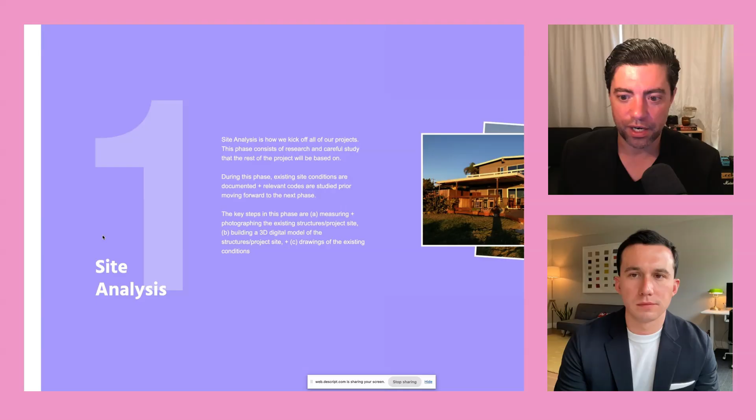Let me explain why. If you're looking to do a remodel, this probably takes the most time for phase one because we have to measure the entire structure. If you're looking to do a home on a vacant lot, I have to receive a survey from you, generally with contours, and then we'll model that — it's much quicker. And if you're looking to do a detached ADU, like in the example you presented, Billy, oftentimes I don't have to measure the outside of the existing home. So right there, you have 3 different variations on phase one. Basically, phase one is creating an as-built drawing package, which shows what is on site at the moment.

Once that's complete, we can move into design, and schematic design is basically the first step of that process. Not every project needs a schematic design phase. For example, if you were looking to do a garage conversion to an ADU or a JADU, we would skip this phase because we generally already know where that ADU is going to occur, and within the limitations of a 1 or 2 car garage, there's only so many things you can do.

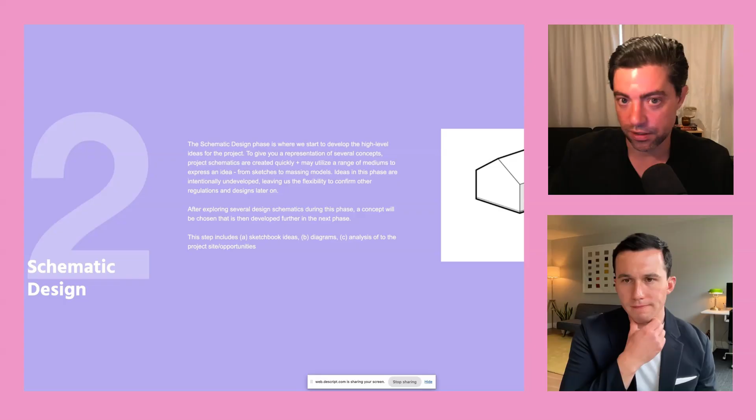But in your scenario where you want to do an ADU, there could be multiple options. Maybe we do the ADU in the backyard on the right side, maybe on the left side, maybe attached to the home, maybe over the garage, maybe in the front yard because the code now allows you to build an ADU up to 800 square feet in the front yard. One of the things you'll notice throughout this process is there's no right or wrong answer — every solution comes with pros and cons, and it's just a constant trade-off.

There are certain things we like to cover in the schematic design phase — access, privacy, views, utilities, solar orientation, these types of things. We want to demonstrate all of these to the client, then we'll present multiple options along with the pros and cons of each. We'll discuss with the client and see which direction they want to go. So schematic design is a very high level design phase, and one of the things you'll notice as we go through these 4 phases is you start very broad and narrow things down in each sequential meeting.

One of the other things you'll notice as we go through these 4 phases is you start very broad and narrow things down in each sequential meeting. So once we present the schematic design options and the client has made some decisions, we move into the next phase: design development.

This is the phase where we're doing the most collaboration with our clients. This is the first phase where you'll see floor plans and elevations. We'll do 2 to 3 meetings, depending on how large or complicated the project is. In these meetings, we sit down with the client and explain the design, which is based on phase 2.

Then we look to get feedback from the client. Maybe they determine the bedroom needs to be larger, and this is the perfect time for them to let us know. Or maybe they need more closet space, or they've decided they want to sneak an extra bathroom in.

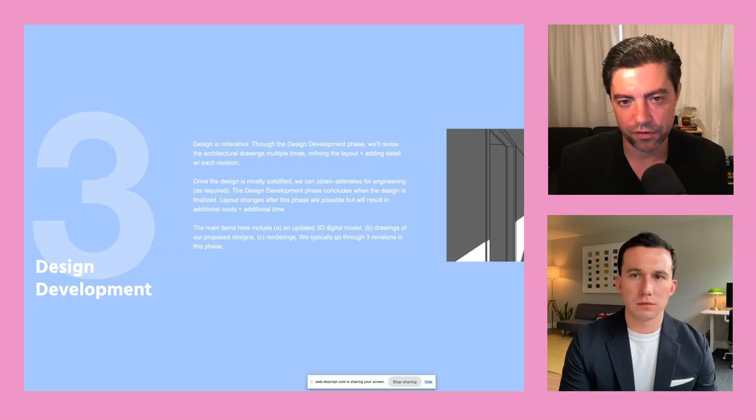Generally we provide a full kitchen layout with kitchen elevations, lighting plans, electrical outlet plans, and a landscaping plan, which we call the exterior design plan—basically the bare minimum for landscaping. It doesn't replace hiring a landscape designer, but it satisfies the minimum requirements of the City of San Diego, which often requires certain types of landscaping to be planted.

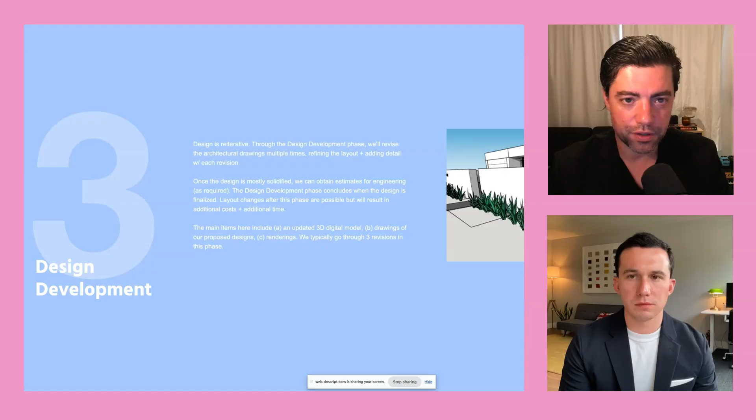So the design has to be finalized here. Phase 2 and phase 3 is where the design occurs—that's where we do all this work with our clients. After the design is finalized, we move into phase 4.

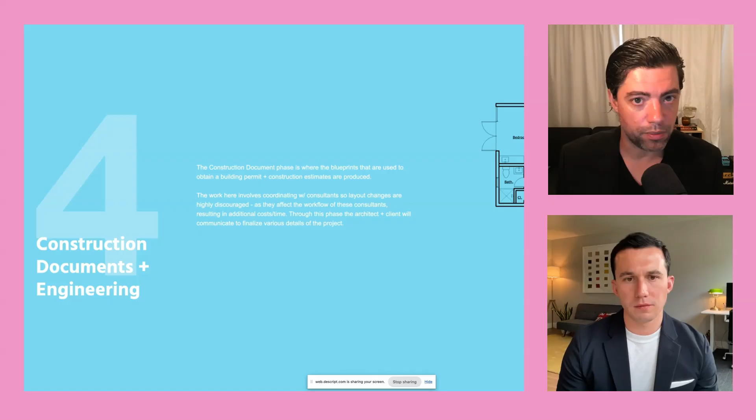In phase 4, we take the finalized design and begin to produce the architectural construction drawings, generally about 35 to 40 sheets. We also commission the structural engineer and the Title 24 consultant, and they begin their work. So in this phase, you have at least 3 different professionals working on the project at the same time.

We're coordinating with each other, but sometimes the client doesn't need to be aware of it. If the structural engineer says, hey, can I fit a 12-inch deep beam here rather than a 10-inch deep beam—that's a decision I can make myself.

But if the structural engineer comes back and says putting some posts on this balcony would be a lot more structurally efficient, that's something I'd go back to the client about—asking if it's okay to put posts there. Or maybe we're in an area where we can't put posts, and then I don't have to go back to the client; I just let the structural engineer know we've designed it in a way that we cannot do posts. There's a lot of coordination that occurs in this phase.

At the end of the phase, we're coordinating all 3 trades and putting it all together. On a larger project, you could have more engineering—mechanical, electrical, and plumbing—or a civil engineer if there's right-of-way work, such as a water meter upgrade, sidewalk, or driveway improvement.

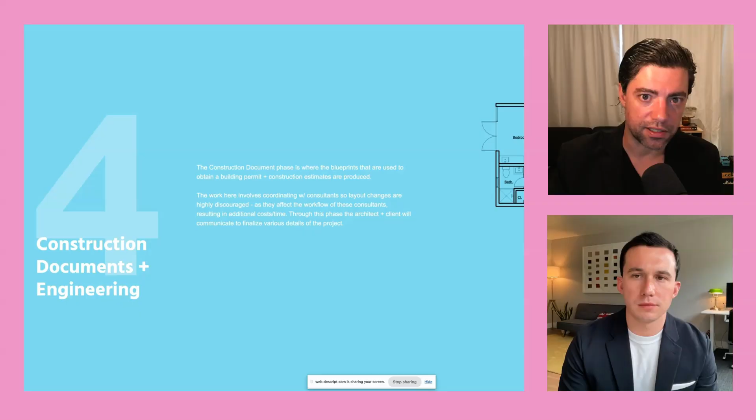Further along in the process, the more money you're committing and the more rigid the design becomes. In phase 3, the design is still flexible, but less so. In phase 4, we can't make more changes without increasing cost, because now I'd have to pay my structural engineer more to redesign, or the energy consultant more, or use more of our own work hours to accommodate the redesign.

I'll just touch on permitting briefly. The next phase is permitting, and at Ten Seventy Architecture we have an integrated design and permitting process. That means we're doing the design, managing the engineering like most architects would, but we're also doing the permitting.

We don't have to hire a permit facilitator because we do this in-house, and we have the best permit facilitator in the city, which is my wife. She used to work for the building department, so we're very good at getting permits in the city of San Diego, which is often the biggest risk on most projects. Can we get it permitted? Will the city approve this design? The next phase will probably be bidding or construction, depending on how you run the project.

And then there's an interior design phase, which could occur later. Once you end up in construction, the project is even more rigid because you've already committed more money, and it's more difficult to change because you may have to go back to permitting or engineering. You do not want to move backwards through this process. You want to move only forward through it.

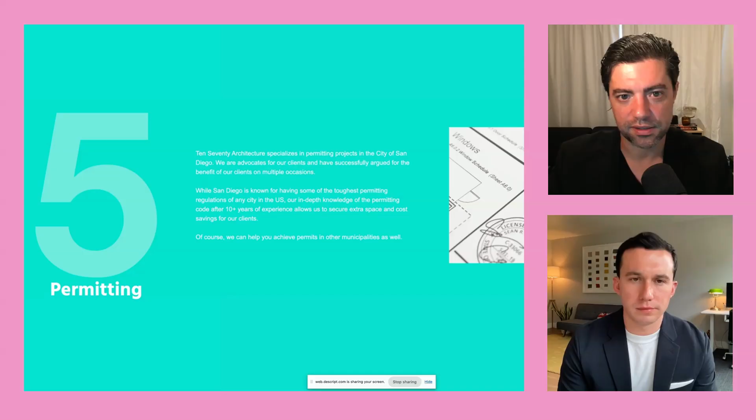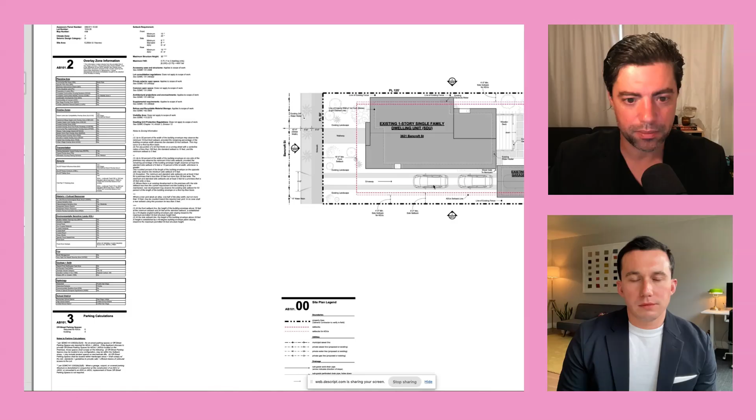So this is an as-built drawing package. It shows what's here — the existing dwelling unit and the existing garage. We have the parking displayed here because that's going to become important later, and we have all of the lot dimensions. We've also created a rough rendering of what's there now.

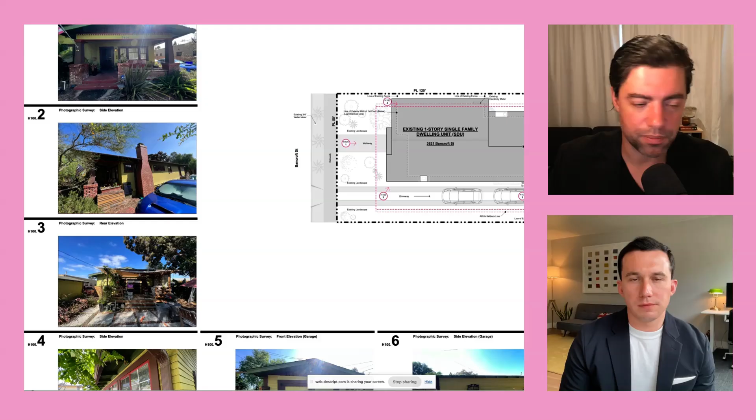So we have some information here — we've done all of our zoning information, which lists all the setbacks and everything, and then we have elevations of the existing home. On this project, we did not have to measure the existing home because we're not going to modify it. Additionally, as part of phase one, because this structure is more than 45 years old, we have to submit a potential historic package. So that's what this is here — it's fairly easy to create.

It's a site plan which references different photos. This package would get routed to the historic department, and they would determine if the project is potentially historic or not. If the house you bought, Billy, was more than 45 years old, it would take us a few extra hours to put this package together.

Okay, now let's take a look at the schematic design phase. Generally you know what you're looking for, but it's still pretty open-ended, so we want to start to narrow that down. This is an example of the schematic design package we did for this project. Here we're showing where the ideal views would be.

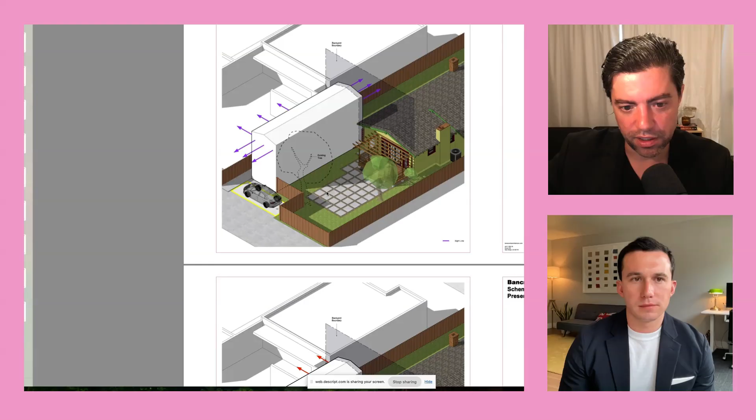This client wanted to create some privacy in their backyard, so we're not using this side of the structure for any views. Here we're showing the views that we do not want — the client was very specific that they did not want views into their neighbor's backyard.

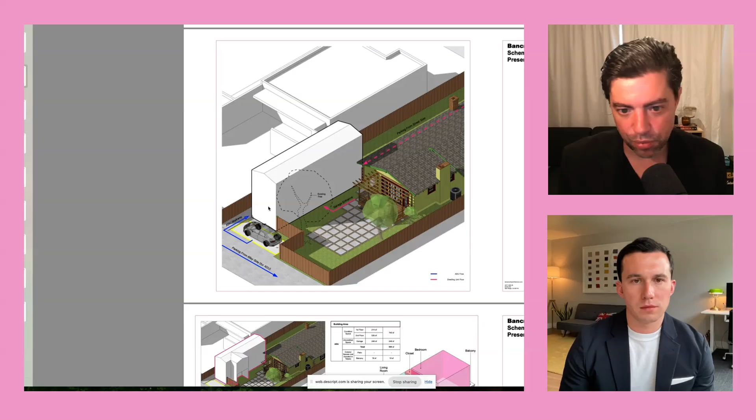Here we have different access points. The homeowner enters the home here, and can come out of the garage and enter the back of their home here, while the tenant of this ADU is going to park here and enter the home on the side. So there's complete separation between these access points — the existing home where the client lives won't be bothered by having a tenant live here.

And then we get into some different options — these are the options I mentioned earlier. We're going to show the client and get feedback to see if they agree with some of these decisions. Here's an option where we have the garage here, and you can see it in 3D right here, and additionally we have a massing over here. So depending on which way we position these rooms in the floor plan, it's going to affect the shape of the ADU and the garage.

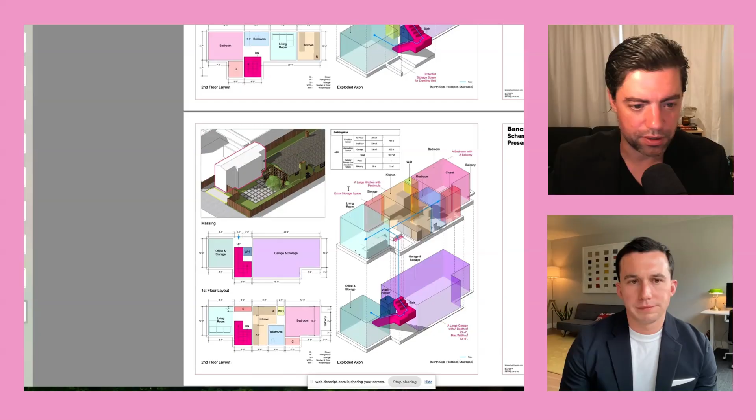So on this particular project, we actually went through 7 different options. Each of these comes with pros and cons, and each is slightly different in size, so they have different construction costs. In this phase, we're usually going to have one meeting on the front end, which we call our client interview.

That takes about 90 minutes to 2 hours, and we're going to get input from the client. Then we're going to do all this work, and then we're going to have a second meeting, which is the schematic design meeting, where we present the work and get feedback from the client.

This phase on a project like this will usually take about 1 week. If you factor in the client interview, the whole thing could probably take about 2 weeks because the project is fairly small, so it does go by pretty quickly.

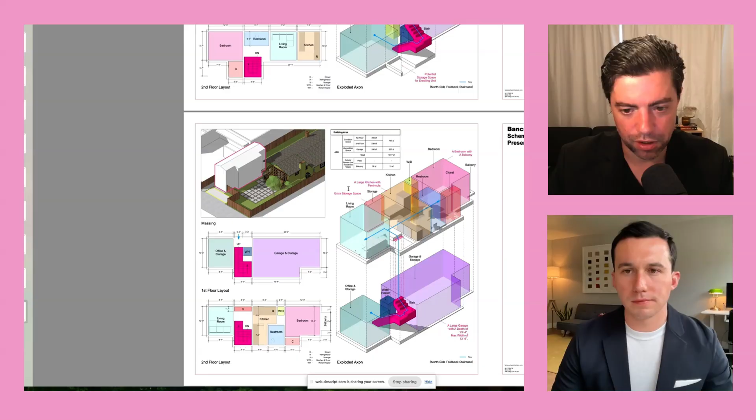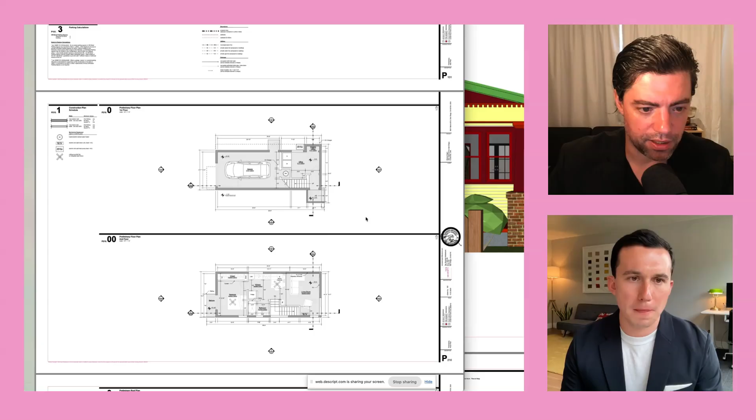Now, on this project, we did 3 design development meetings, so each one of these is a design development package. So this is phase 3, and in each package we're showing the client basically what the floor plan looks like, and we're getting feedback.

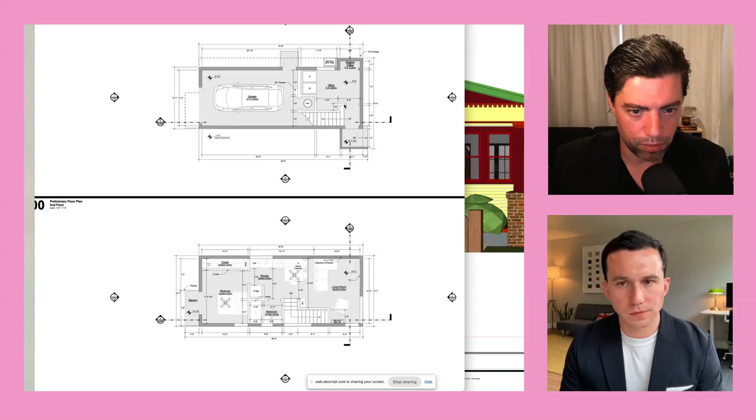You can see here's our garage. We had an office positioned down here. This could be used as a second bedroom, or it could be used as a home office for the homeowner. So we incorporated a little bit of flexibility in the design there.

And then this is the second floor, so this is mostly where the ADU tenant is going to be. We have a roof plan and we have different elevations and we have sections here.

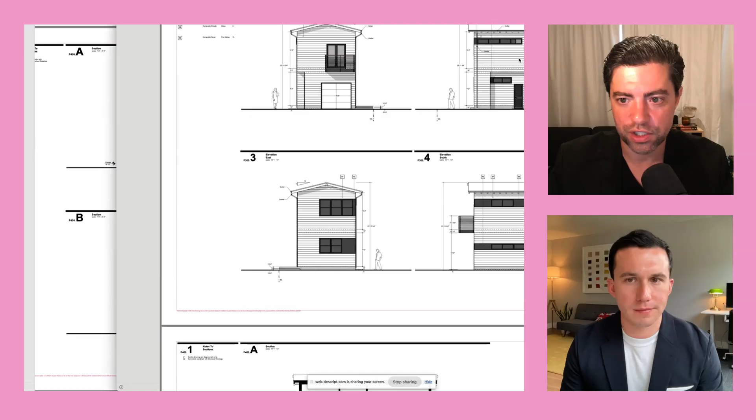And then we went and did the whole process again based on the client's feedback. Here we're showing modifications to that floor plan based on the client's feedback, modifications to the ADU design, and then alterations to the elevations and then the sections.

There's subtle differences here, but we're also going over the kitchen elevations. We're going over renderings and different color options. So as the design development phase progresses, we're getting into more and more details.

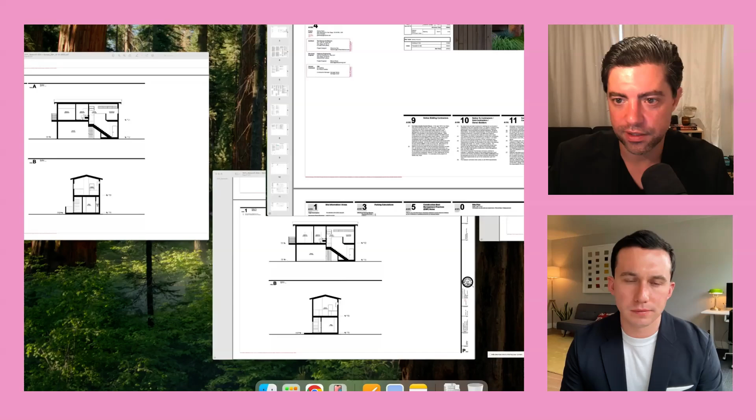And then the client agreed that the design was finalized. We produced the architectural drawing set. If I look here, we have 16 sheets in the design development drawing set.

But once the design is finalized and we turn this into a drawing set for submittal and for bidding, we now have 43 sheets. So a single change in this phase could have a ripple effect, which may require us to change 10 or more sheets. That's why we really discourage changes at this phase.

The more requirements the department sets for their submittals, the more time it takes us to create this drawing set. So when the building department all of a sudden requires a landscape plan because they need to verify there's a certain amount of trees on the site, or a certain amount that need to be planted, that just increased our workflow by probably 2 to 3 hours, and that increases our cost that we have to pass on to the client.

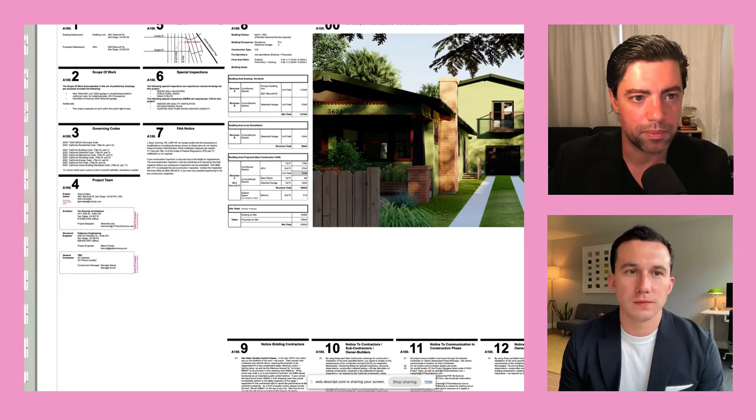There's a direct relationship between the requirements that your municipality is looking for and the cost of these drawings. If it's not a requirement, then we should not have to do it, to keep the lower cost projects a little bit less expensive for our clients.

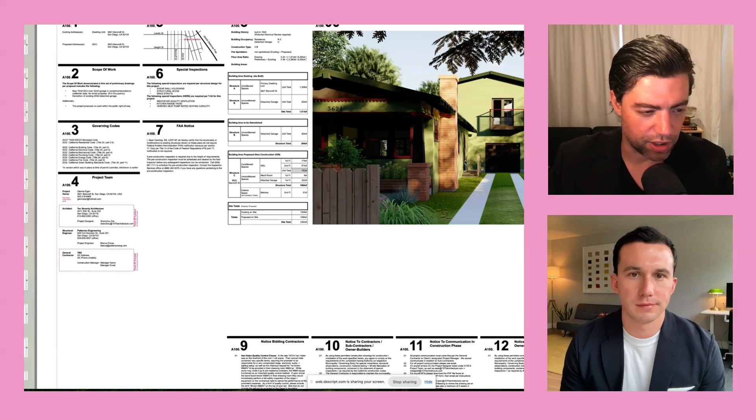So here we have a rendering of how the project will look when it's finished. You can see that's the ADU, here's the garage, and this was the existing dwelling unit. So if you compare here, this was our design development set, and this is now our construction drawing set. You can see everything is getting a little bit more realistic.

Now here we have all of the information that the building department needs. We have some notes that we put on our drawings for the building department, and we have a sheet index here which explains where to get to all the drawings. This is actually the official permit stamp, so when you see that, you know it's permitted.

Then here we have a site plan with all the information that the city needs. This is our stormwater management plan, which is another thing that the city is requiring now. The city is requiring all of these notes to be put on the drawings, so these are cookie cutter notes that we have to put on every single drawing in the city of San Diego, and these are our standard notes.

And then over here, we have more notes the city of San Diego is requiring, and then here we have more of our standard notes. This is documentation the city requires, so we have to fill this out for every project now. Here's more documentation the city requires, and you guessed it, even more documentation that the city of San Diego requires before they'll issue a permit.

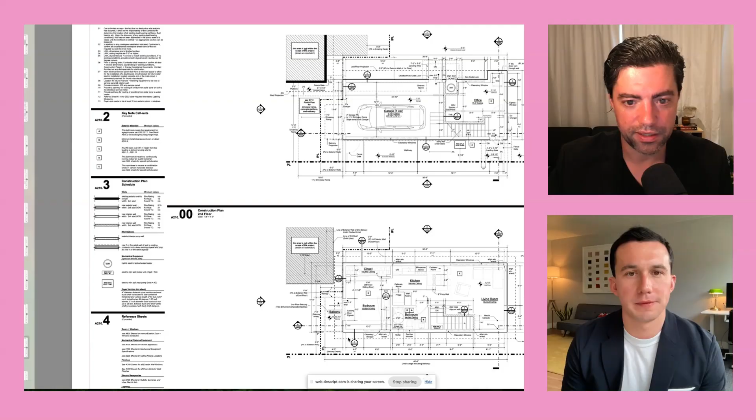Now we have a demo plan, which just shows the existing garage to be demolished. Then here's our floor plans, which show all the dimensions. We call these construction plans now. Here's our roof plan, which shows how to build the roof, where the gutters are going to be located.

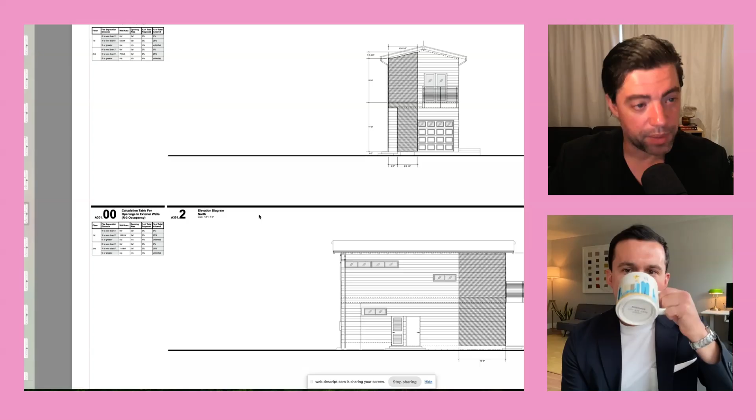And then here's our elevations. We have 4 elevations for this particular project. Depending on how close your structure is to the property lines or other structures, you may have to provide additional diagrams to make sure you meet all your fire safety separations.

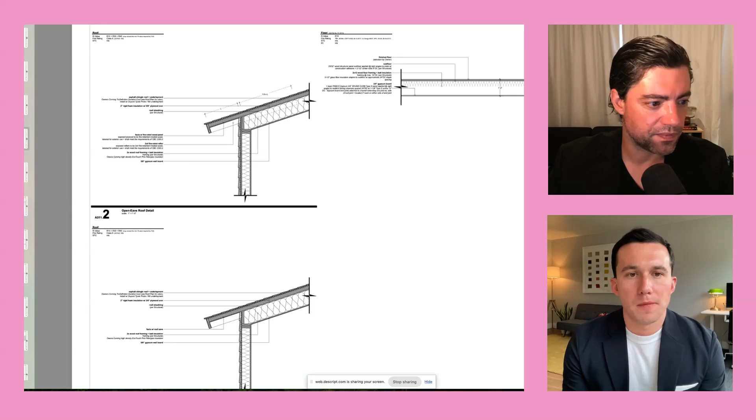Then we have sections, which would provide more information to the builder and the permit office of how this thing is going to be built. Then here we have some standard details, and here we have some specific details. Then we have wall details, roof eave details, floor details. These are details for drainage, how we're going to handle the water on the site.

I mentioned we detail out our kitchens on most of our projects. So this is a kitchen layout here, and then here we have 4 elevations for that kitchen. The contractor or the owner does not have to go work with a specific kitchen designer. They don't have to go work with Home Depot and get a kitchen designed that doesn't match the way we had designed the project. When we do this in-house, we can keep the windows aligned with the cabinets, make everything super clean. So this is a benefit to our clients.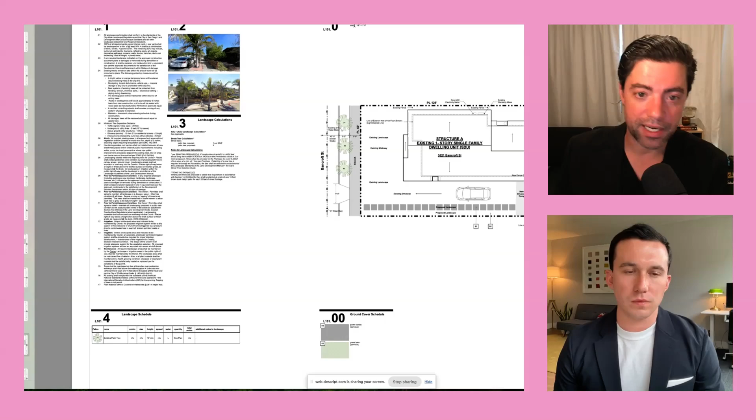And this is our landscape plan. We used to call them landscape plans. Now they're called exterior design plans because we determined that if you submit a landscaping plan, you automatically get your project routed to the landscape department, even if it's not required. So we don't want to do that anymore.

Then this is some of the work we've coordinated from our consultants. I'm going to skip through these quick because this is what a Title 24 report looks like, but it's actually very difficult to read. The state provides this format and our consultant gives us the documents in the format that the state requires.

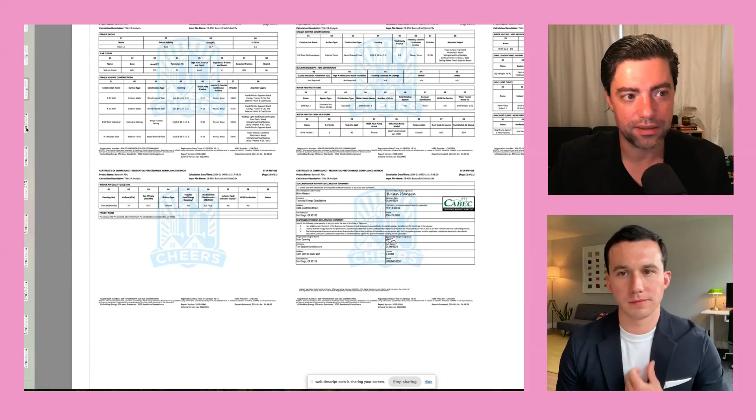And then here's our structural package. You can see we have some details here, these are some standard details. Then we have the foundation plan, we have the framing plan and the roof plan, and then we have specific details for our project. So that's 43 pages of a construction drawing set that is required submittal.

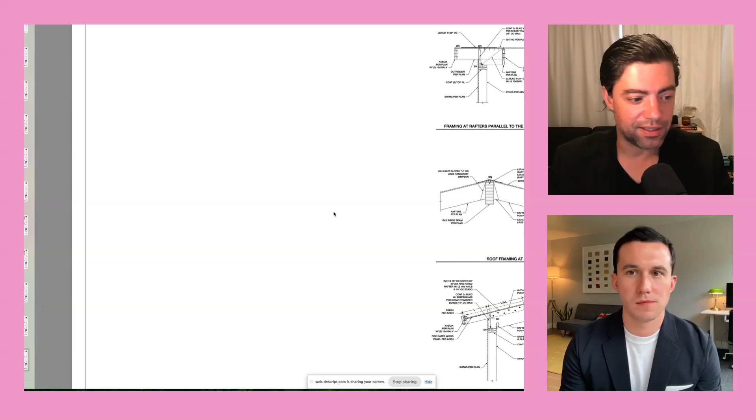In other municipalities, you could probably get a permit with about 5 sheets. In the city of San Diego, we're looking at 43 sheets to get a permit. So that's the whole process, Billy. Let me stop the screen share here. What do you think? You ready to start your project?

Okay, that was a lot. That was much more technical than I was expecting. I feel like when people envision an architect in their mind, they think of a Frank Lloyd Wright or like Don Draper type character, in terms of just being very creative, big picture, spur of the moment idea that they implement that's completely left field. But I'm surprised at how technical it actually is. I feel like we think of the architecture field as being much more creative, whereas it actually seems to be much more technical, at least in San Diego here with all the documentation requirements.

Now that you understand the process, you can look at it like this: the creativity is going to occur in phase two and phase three, the design phase. Phase three will last somewhere between 3 and 6 weeks, and phase four will last about 6 to 8 weeks, depending on how much engineering is required. And then permitting is going to last about 8 months if it's a simple ministerial project.

I love the creative aspect of architecture. That's probably the reason I got into it. But you really have to be left brained and right brained, because you get a brief moment to be creative, and then you're going to base thousands of dollars worth of engineering and commit months and months of technical work to that brief spark of creativity.

In terms of the client's involvement, then, what exactly do they need to review any of that technical paperwork, or is that kind of just background stuff that you're mostly handling?